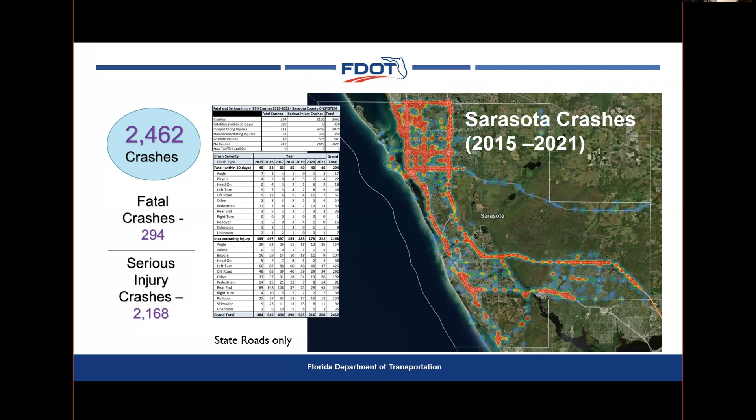Next slide. And these are only on the state roads, obviously. This is just since 2022 up to early '23: 44 crashes, 7 of them fatal, 37 serious injury. Again, just on the state roads.

If you're interested, we have these same kinds of data sets for all of our counties in District 1, which are 12 counties total, from north Polk in the north, all the way down through Collier in the south and across to Okeechobee.

So also, if you wonder, Steve, why are we not getting to something quickly? We have the largest district in the state by area and lane miles, so we have a lot of roads that we're working on. We're not putting anything off because we want to. We're trying to get to them as quickly as we can. Next slide.

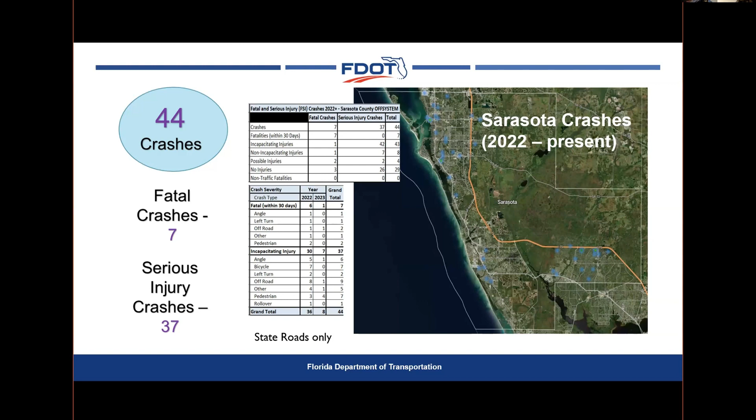So with bicycle and pedestrians, that's the piece that I was asked to address for today. I'm going to show you some of the initiatives that we're doing here in the downtown area. There are obviously others in other parts of Sarasota County, but these are closer to where you are.

This is the 301 corridor, the northern part of it. This is Fruitville Road down here in the south, going north up to MLK here. There was a project supposed to go in February of next year, which will be a pedestrian hybrid beacon, similar to what you see on some of the roundabouts out here. That's going to go up here at 21st Street.

Then just north of Fruitville, this was one completed back in August of 2019. They did a median modification project that closed out that two-way left turn lane and limits the number of cross lane traffic. Then at 6th Street, there are some short-term pedestrian safety enhancements, right down in this area, that we're evaluating to see what kind of long-term treatments we may do there. Next slide.

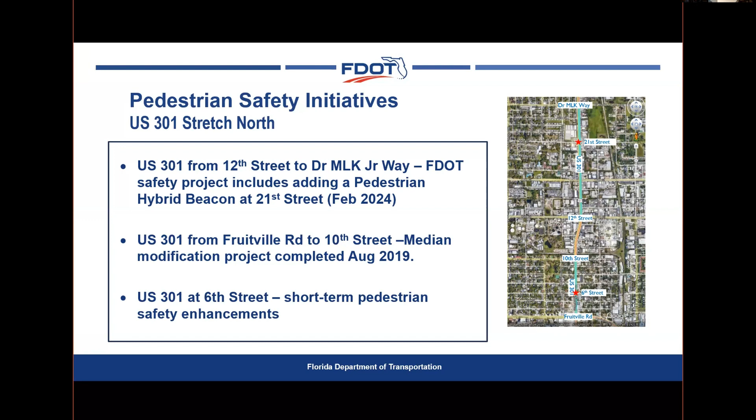This is a chart showing the median modification project on 301 just north of Fruitville. These are the numbers of crashes and fatalities. All crashes is this line, and fatal and serious injury crashes here. This was when the project was in, so it went up fairly high. These are bike-ped crashes, this line here, and you saw a dramatic drop, and now they're kind of hanging down in there. That's the kind of improvement we're hoping to see: a drop in serious crashes, and in urban areas like this, a drop in pedestrian and bicyclist crashes.

Some folks may say this is still a lot of crashes. Talking with some of the folks here before the meeting, one factor we're going to talk about a lot today that we cannot really control is human behavior. A safe system approach acknowledges that humans make mistakes. There's only up to a certain level that we can do something to impact or influence that behavior. Ultimately, it's the driver behind the wheel.

One of the things we saw during the pandemic was the number of crashes went down. Why do you think? People weren't driving, but the number of fatalities went up. Higher speeds, because the roads were more open. What have we seen since then? Fatalities are still climbing, because all the people who weren't on the roads are now back on the roads, but that behavior has not changed.

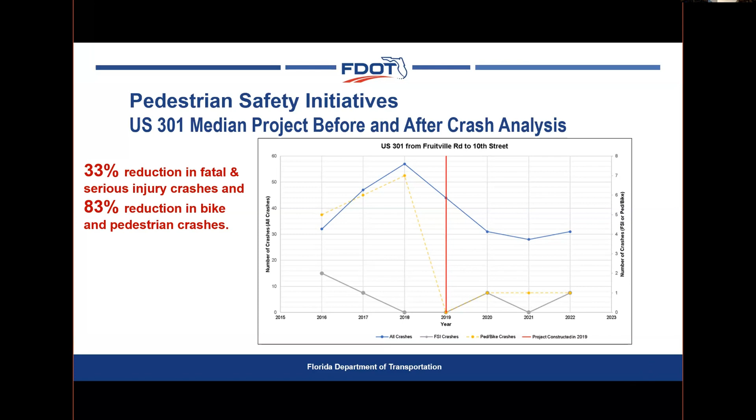This is a PHB. It used to be called a HAWK. I don't remember what HAWK stands for, but it doesn't matter because it's not called that anymore. PHB, pedestrian hybrid beacon, is something different than an RRFB, which is a rectangular rapid flashing beacon. You'll see some of them as a little rectangular thing that flashes real quick. This is a solid red light, flashing red and then it goes solid. The major difference is that cars may not stop for the RRFB even though they're supposed to, but they really better stop for this, because if they don't, it's treated like a red light running offense.

There are some regulations on where we can put these and where we can't, and the main thing is speed limit. By statute or regulation, we can't put an RRFB if the posted speed is higher than 35 miles an hour. So you'll see them at 35 miles an hour or less, but not at 45. A lot of these roads around here are 45, so you won't see an RRFB there.

One of the reasons we put a PHB down here between Fruitville and Gulfstream - I asked why couldn't we put one, since I think it's 35 coming into there. The response was that when there's a big event at the convention center or the Ritz, and all those people let out, where do they want to go? They're going to cross 41. An RRFB would be stopping traffic like every 10 seconds if it stopped, because it's just that constant flow of human mass going across the road. This will stop the traffic, let the people cross, and then let the traffic go again, so it keeps things moving smoothly and more efficiently in both modes. That's one of the things we're doing.

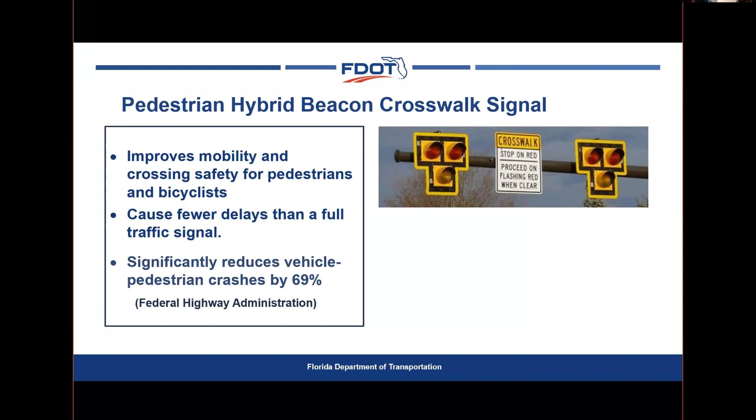The big thing is it reduces vehicle and pedestrian crashes by 69%. So again, reducing those crashes is what we're trying to get to. Next slide.

Pedestrian treatments at Alderman. This is the southern part of 301. This is where the Ford dealership is, where I sold my F-150 last year.

So down to Siesta Drive, we did a road safety audit. I call that the melting day. These guys were with us. It was so freaking hot out there that day. We are dedicated public servants. I kid you not, it must have been 125 degrees, and we walked from here all the way up to the Publix and back.

When we do that, it's to get an eyes-on look, not drive-by, all that kind of thing. It's looking at what's going on, like the angle of the sidewalk for people in a wheelchair or walking with a cane - if the angle's too much, it causes more difficulty. Or there's not a place at the curb for a wheelchair or walker to ramp across the street. Utility poles in the middle of a sidewalk, where are the bus stops, all that kind of stuff. We look at those things.

We had about 40 of us out there that day. We split into two groups and went up and came back. It was DOT people, city people, county people, and various association people.

Okay, this is on 41 North. Here's Boulevard of the Arts, here's 47th Street. We were asked by the city about doing a crosswalk up in this area. They had a couple of locations we were looking at, and right now we're looking at something probably going in at some point just south of 47th Street.

That's in the city's hands now. We did our assessment, and now they've got some stuff they have to try and work out. I say it's a collaborative thing - we all work together to see what can be done and when, and combine various streams of funding to do it, or right-of-way acquisition, finding the best way, because we might be able to save some money that way.

That's that one - 41 and Boulevard of the Arts. Had a great conversation with the folks over here earlier. Let me check my notes here, because all these roundabouts were put in before I got into the job - I'll put that disclaimer out there so you can't blame me for any complaints. Blame Nicole over here. But right now, there's not any planned safety improvements out there at Boulevard of the Arts, because the data and studies we had did not project any real need there.

Talking with these folks here and knowing what's going on across the street, what I'm going to get with my staff back in Bartow is look at doing a speed study in that stretch and a safety study to see what kind of improvement might be needed with all of this new growth and development happening across the street. But we're going to wait on doing the speed studies probably until the Fruitville Roundabout is done, because I'm going to fling that out there.

This is Sunset and Gulfstream, the crosswalk there. We had a meeting a month or two ago with a bunch of residents of the neighborhoods, mostly in this area, about what we can do out there. We got with our traffic operations guys, and again, we're limited in what we can do immediately because of the construction and the maintenance of traffic issues at Gulfstream impacting that intersection. But we have some concepts we're working through now, and we're evaluating them to see what might be a good long-term solution there.

This is a little bit outside the downtown area, the intersection of Fruitville and Beneva, the big shopping center out there. We're looking at doing a safety project out there in 25 that is going to be some signing and marking enhancements and signal improvements to help traffic flow through that intersection, both pedestrian and vehicular.

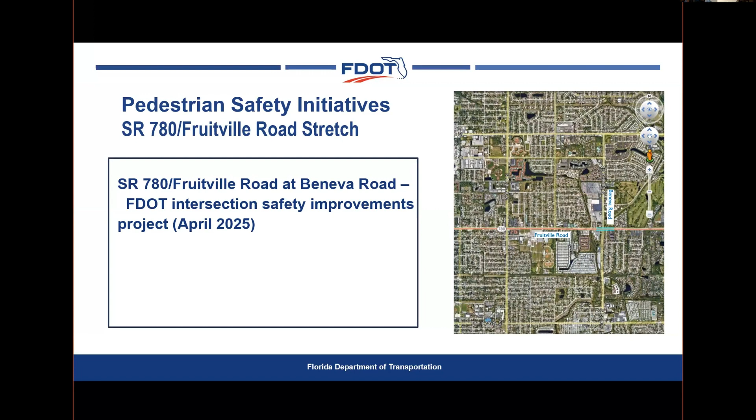Next, Jim, it's not off. I think this is my last slide. I want to show you this, the green roads there. This is a lighting retrofit.

We're changing out all the old high pressure sodium lights. I'm not an engineer, I'm a historian, she's the engineer. We're changing them out for LED lights. What I wanted to show you here is this number, 334 and 917 lights that were replaced by the city and county of Sarasota. So again, it's another collaborative success story of what we're doing there to replace these lights, to make them better and light up those roadways a lot more efficiently.

And that's all that I have. We'll be around for questions.

So we had a question posed to us, what's next post Gulfstream roundabout? So we have a couple of different topics to talk about regarding what's next. Let's start with the Big Ringling Bridge.

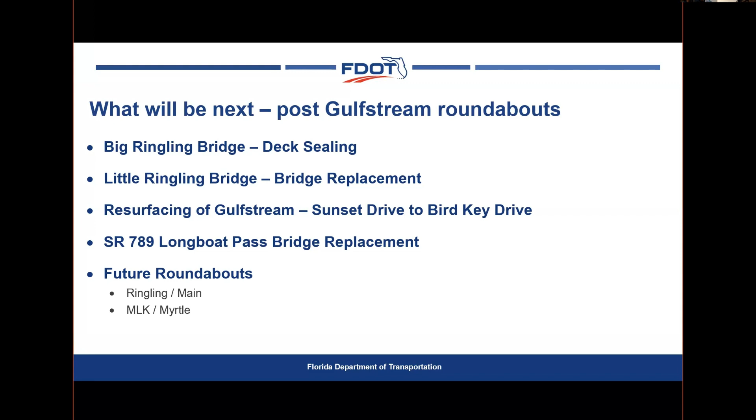Next slide, please. So the Big Ringling Bridge, no, we're not rebuilding the bridge. The bridge is fine. We're resealing the deck because it's in a saltwater environment, it's corrosive. So in order to keep the bridge working the way it should, we have to put a sealer on it, like your fence in your backyard. That will be done this summer. They're going to grind off the top surface of the bridge deck, seal it, and then restripe it. So that's the orange project.

Then we have a resurfacing project, shown in red, which starts at Sunset and has a break over the bridge, since the bridge is concrete and we don't resurface that. It continues over to Bird Key. Our work program has it listed wrong as Bird Prey, we have to get that fixed. We also have another bridge in a PD&E study, getting ready for replacement, the Little Ringling Bridge, shown in purple. And the green is the Gulfstream roundabout.

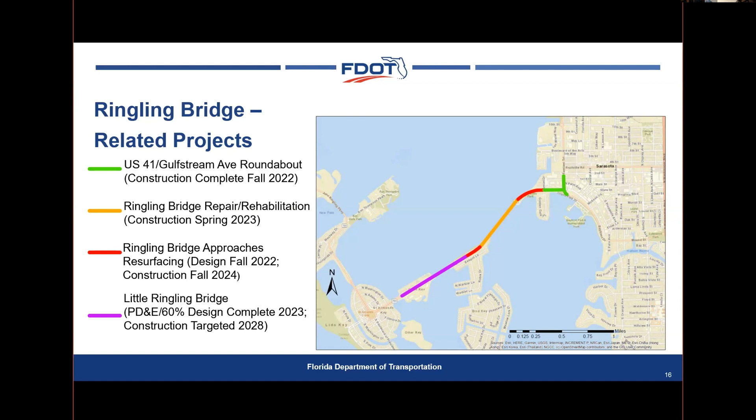So regarding the Ringling Bridge, this is the current typical section. You have 12-foot wide travel lanes, a 10-foot wide bicycle lane or shoulder, and behind the barrier wall a 10-foot wide sidewalk.

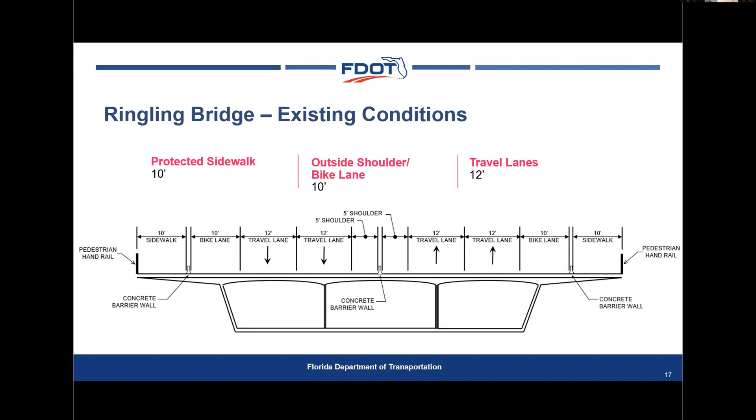When the restriping and sealing job comes through, we're going to adjust the typical slightly to accommodate the trolley a little better. We have the Bay Runner trolley out there, highly successful, a beautiful ride, fun, probably very full on a day like today. The 10-foot wide lane out there now is a little tight for the trolley itself, so with the restriping we're going to move everything over. We'll have a 5-foot shoulder on the inside, a 12-foot travel lane, and a 10-foot wide travel lane, then a 2-foot buffer stripe, like on some bicycle lanes, and a 10-foot shoulder.

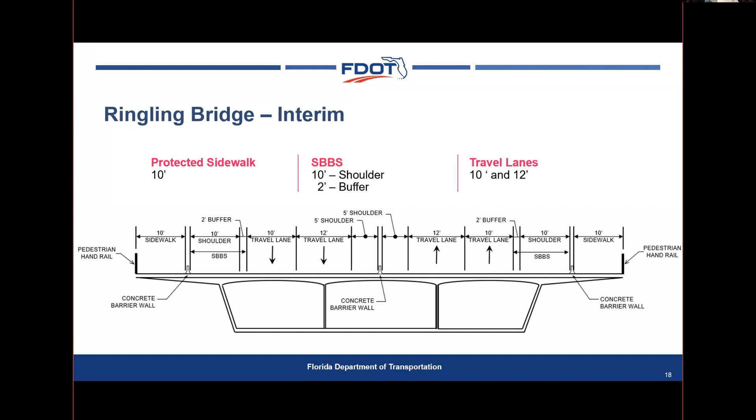This is what's out there now. We added the buffer to allow for the trolley's mirrors. I don't think the trolley drivers realize they can go into that buffer area if they need to get around a sign, because some mirrors have been whacking the signs on the concrete wall. Right now we call it a shared bus-bike shoulder, so bicycles and e-bikes are sharing that lane with the trolley. It's been working, but there's not a lot of room for regular bicyclists trying to get up that grade with a trolley behind them.

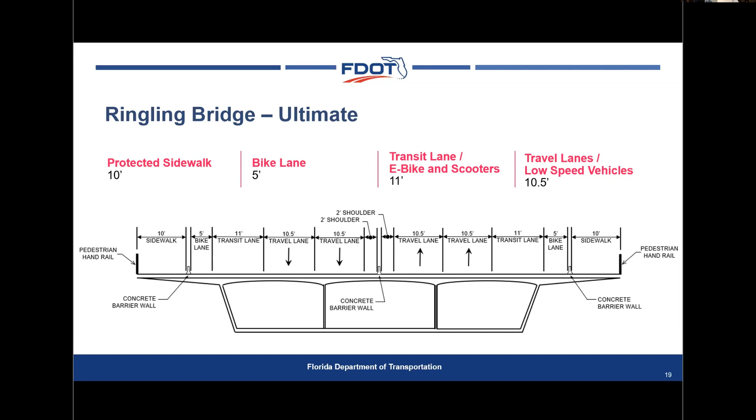Next slide, please. We go to the resurfacing jobs. So you have the Bay Runner. When we get over into the resurfacing, the typical will continue all the way over until you get to St. Armand's, and at the circle, everything changes.

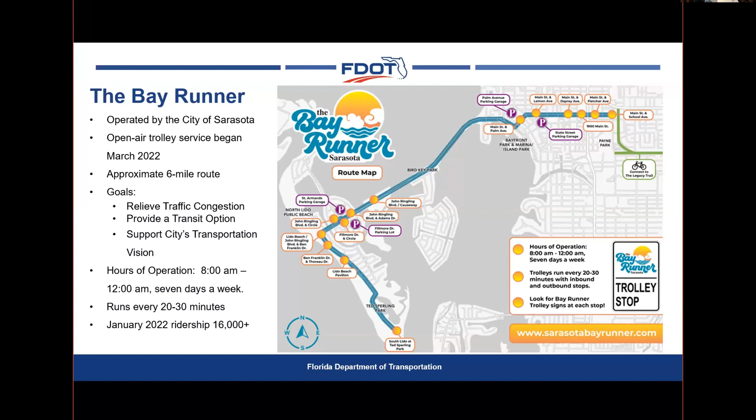So here's the Bay Runner. The city and DOT have an agreement where we funded 3 years to get the trolley up and running, and we have 1 more year of that funding. Now we're working to get additional funding to the city and a plan where eventually the city can take over 100 percent. Right now it's still free, and it's for the city to determine when DOT moves away from the funding. DOT's goal is not to fund in perpetuity; if it's a successful route, you want your locals to run it themselves. But the city's doing a great job with this trolley service, with park and rides down here to the beach. Park in the parking garage and go to the beach, at least that's how I do it.

Years ago, during my time at DOT, the city came to us wanting to change US 41, take out the signals, and make our big intersections roundabouts. I remember that meeting, and I thought there's no way that'll ever work. Well, I was wrong.

We've got some in place now. I think 9 was the original overall plan, and we have 4 in place currently. I'll show you about 2 more here. So for Ringling and Main, the PD&E is done. This is just the concept. We're still waiting to get design money, and then we'll need right-of-way and construction money. As soon as we get design money, we'll be good to go.

The thing is, when we start these jobs, we want to make sure we have our other phases funded. When you start design, you want right-of-way money, then construction money. Otherwise it turns stale and gets old, and then you have to redo it, which costs more.

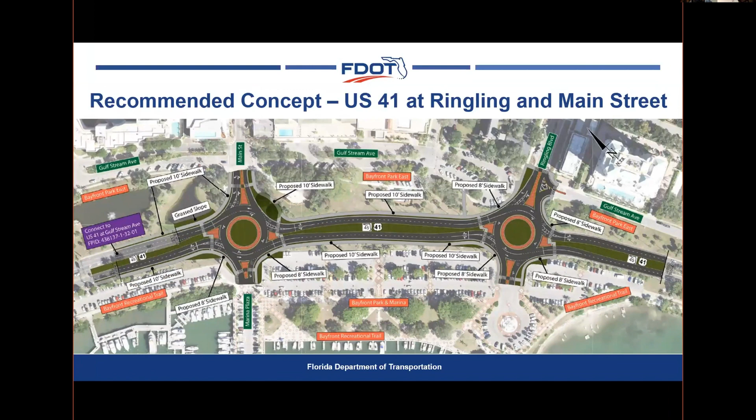So next, we have 2 more roundabouts. MLK is a bigger one, we need a little more right-of-way on this one. Then the next one is Myrtle. Those two, MLK and Myrtle, are currently in design right now, but we're looking to get right-of-way money. We'll see what happens.

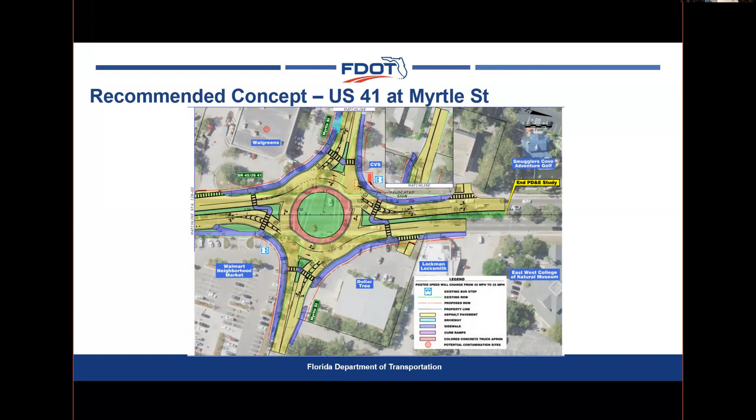We'll start our work program gaming cycle, looking for money in July, and hopefully we'll find something, because the longer we wait, the more expensive it's going to be. All right, what's next? Is that my last one?

Okay, and then we'll talk about Fruitville Road. I want to share some highlights from what we've been doing in planning, starting with a corridor vision plan we did for Fruitville Road.

It's a new initiative we have at the district. Really, all of District 1 has many pieces and parts that are growing or intensifying in density. Our rural areas are becoming more suburban. So we see a need to work with our partners to understand a long-term vision, how they want to see their communities grow, and then we can better understand how we should be adjusting the state roadways so the right road is in the right place. One of the first corridors we did this for was Fruitville.

One reason we did this corridor vision plan, as you can see from this very busy picture, is exactly that - there was so much going on. We were hearing about redevelopment along the corridor, starting to see activity centers shown in red. At the time there was a lot of conversation about where the Sun Trail alignment would be, and we also heard the Bobby Jones golf course was going to be redeveloped.

So with all of that, we're seeing a change in users. This road is already busy, 6 lanes in certain segments, and now we have a lot of pedestrians, bicyclists, and transit on the corridor. We were looking through all the older plans and there were these big ideas, so there was a need to understand how everyone saw this corridor evolving. This study looked at the segment of Fruitville from 301 to past I-75.

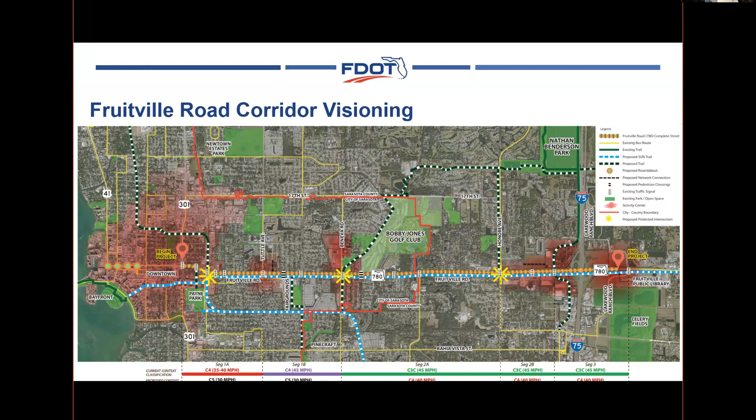We started out because there was a lot on the table. We really wanted to understand what the priorities were, so we did a survey and got a lot of feedback from the public. What interested me was that the top comments were people wanting us to address safety, vehicle speed, and pedestrian access.

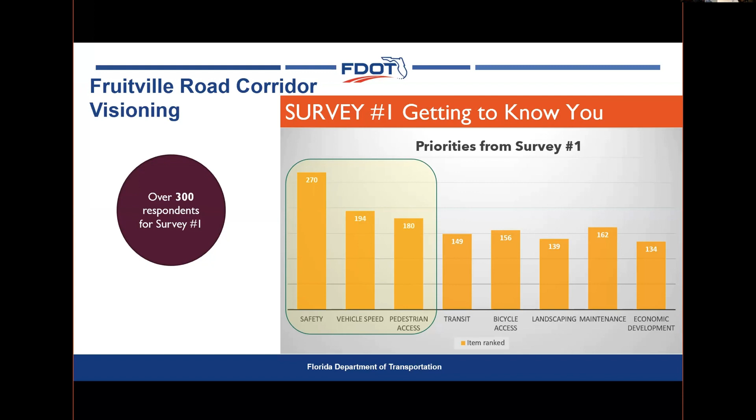When we dug a little deeper into the comments, we saw a lot of the issues relating to safety and vehicle speed came from folks who were walking, biking, and taking transit on the corridor - they had the most concerns about safety and felt people were going too fast sometimes. So that was something we took into consideration, as well as congestion, since we know it's a busy corridor.

So just getting to the meat of it, the point of it, because this took about a year or more. We got a lot of input from the public and our partners, and we drafted a planning level concept, a long-term vision of how the corridor could evolve.

What we drafted was essentially adjusting the widths of the lanes so we could have more space for people walking and biking on the corridor. Instead of having that 5-foot wide sidewalk long-term, maybe it'll be better to have a 10 to 12-foot path. As you can see, this concept on the bottom here goes west of Honore. We tried to draft a concept that took in mind even the narrowest parts of the corridor, but there are opportunities for landscaping in the future.

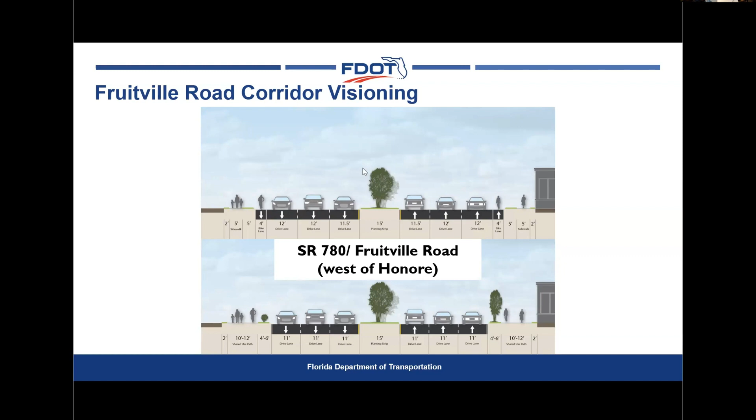Next slide. Now, we do realize that's a long-term vision, 20 years, that's a long time to wait, because that is a rebuild when you're moving curb like that. But we also know that we resurface our roadways on a quicker schedule. So the next time Fruitville is resurfaced, that is an opportunity to start shifting the corridor.

One idea that we put out there that had some support was restriping, maybe having a separated bicycle facility to start claiming that space on the edges for people walking and biking, and see how that goes. We had a lot of comments. Some folks were like, well, what if that works? Well, if that works and we get that input, maybe the corridor stays looking like that, which is one point I want to bring up. These corridor vision plans are the beginning of a discussion with our partners, with the public. As a project moves through different phases, we're always coming back to make sure we're on the right track.

Next slide. And since there was a question we saw about, well, what is going on with Fruitville? In addition to that visioning study, we did want to highlight that we do have the I-75 Fruitville DDI project in the works. This project is currently in design. We have funding right now in our work program in '27. So I just wanted to bring that up.

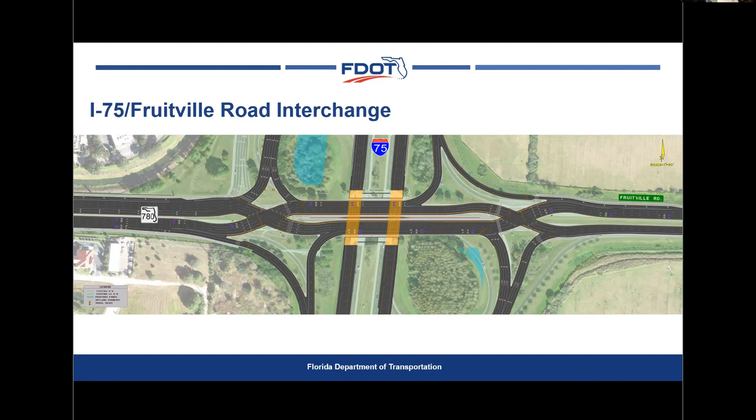I guess one more point to add, the planning concepts I showed you, they align even with this design. This design is trying to manage speeds throughout the corridor. There are sidewalks on this as well. So that was actually a really pleasant surprise to see how our concept is leading into an interchange, and it actually could all work very smoothly. Next slide.

Is this mostly for interstates, for 75? It's, well, DOT does not build the EV chargers. They're privately owned, privately maintained, because DOT cannot accept money, and they take power. So like Tesla or one of the other vendors, they would put their own in and set up how they're going to get the power reimbursed for. So we're just making sure we identify a location that's available every 50 miles.